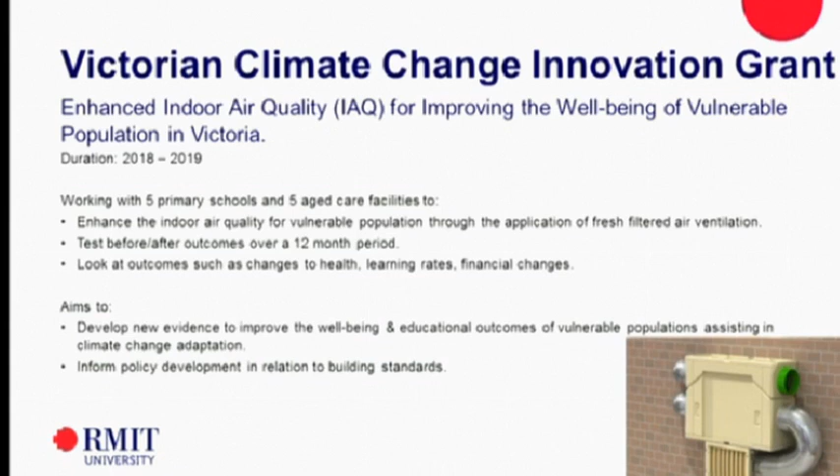It's testing an indoor air quality machine here, you can see it there, and it's testing before and after outcomes across a range of metrics, including changes to health, learning rates, particularly of the students, more so than the aged care patients, and things like financial changes and improved sustainability performance overall. The aim is that we can try and inform more sustainable development in these particularly vulnerable communities moving forward.

On the housing side of things, we're talking about housing today, the Nicholson Apartments, which some people might know in East Coburg, modular construction at the time was trying to include a number of different innovations. So we have evaluated this building over a number of years in terms of things such as resource consumption, thermal analysis, as well as engaging with the occupants - how have they been using these buildings, how have they found it, how have they interacted and engaged with those innovations of the building. There were some interesting outcomes in terms of the building performing as expected, but some of the challenges around the sustainability elements that they tried to include in the building there.

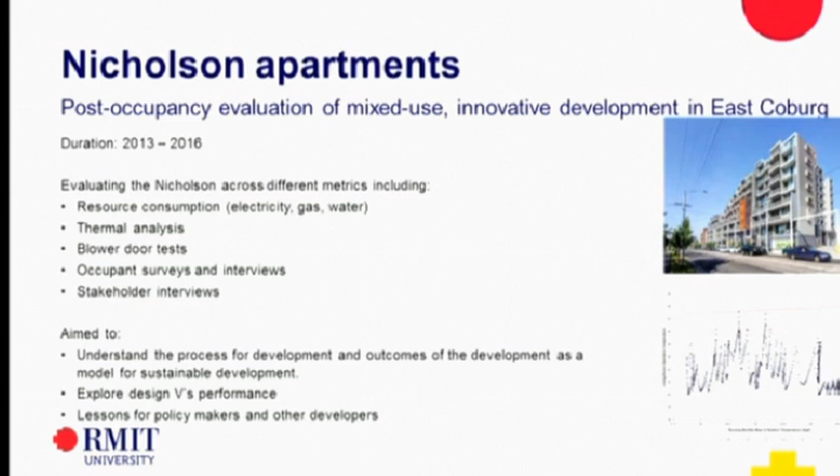The final one I'll talk about here before handing over to Alan is a project where we looked at some housing for the Department of Health and Human Services here in Victoria, who built 4 9-star houses out in Horsham, and we evaluated these over a 3-year period and compared them to their standard housing stock that they rolled out. They were interested to know what the benefits were going to be of improving their housing quality from a sustainability perspective. We found a number of different benefits, including improved health outcomes, improved financial outcomes, and improved thermal comfort outcomes.

You probably can't see it here, but the solid line in this graph down below is the outside temperature in the middle of a heat wave, and it was getting up to 43 degrees there on 2 consecutive days. The dotted lines are their standard housing, and you can see the temperature kind of tracks the outdoor temperature. The solid lines down the bottom are the 9-star houses without air conditioning. So for the department, it was really exciting for them to be able to see that what they were trying to do was kind of working in practice. Now they've been able to design and deliver housing that didn't need air conditioning, which opens up a range of other benefits for not only them, but the low-income households who are in there.

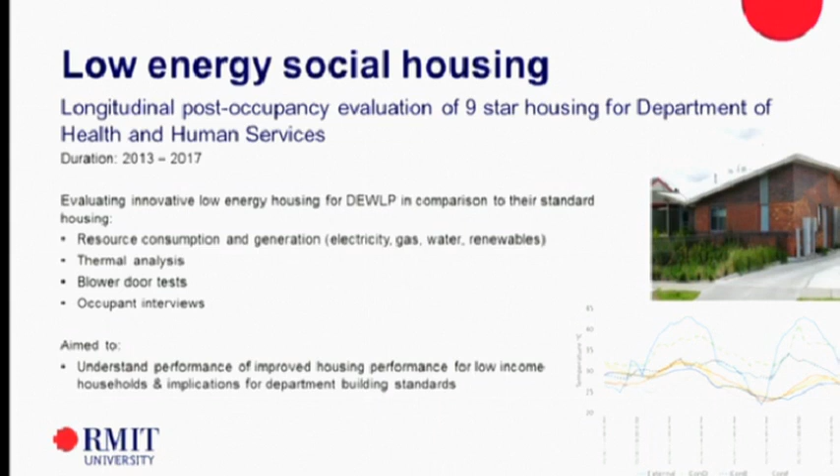The top picture is my west-facing hotel room in Manchester. It was good I was out doing touristy things between 2pm and 7pm, because the room was incredibly hot during that period, despite the air conditioning.

The slide shows the sophisticated heat dumping system of a hydronic heating system, on the window side of the curtain, making sure the area next to the glazing got as hot as possible. The thermometer is actually an old Energy Victoria thermometer.

You can't get them anymore. Of course it takes people like me to carry a thermometer to Paris, but there you go.

I had this nice room on the top floor with a balcony, and it was 35 degrees inside. I thought maybe I hadn't turned the air conditioning on, so I stuck the thermometer in the outlet of the air conditioner, and the air coming into the room was 32 degrees. I took the photograph downstairs as evidence and moved to a lower floor, because it was obvious whoever built this fairly modern building hadn't thought to insulate the roof.

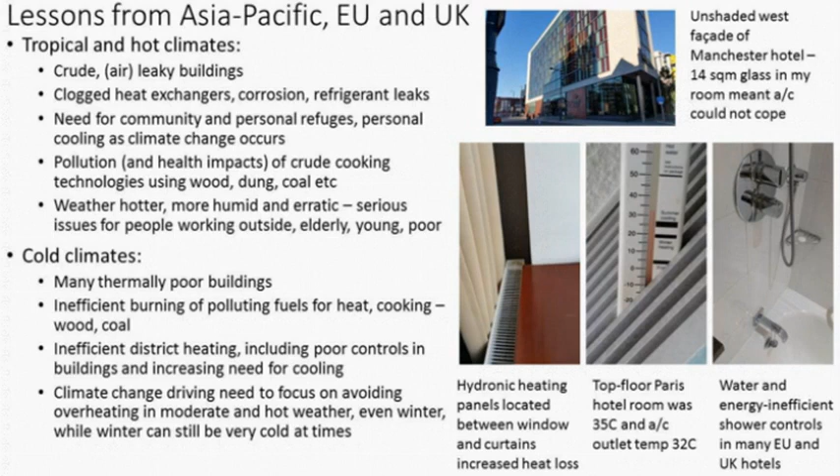So I basically cooked in Siberia in winter, okay? I couldn't work out the controls for a couple of days, and even when I turned it off, it still didn't cool down. So anyway, I think the big message from Siberia was that they're all overheating, even in winter. And I'll go to the next slide and that'll show you why.

So the top slide is the view from the lookout in Santiago over the coal smoke. The middle one shows the hydronic heating system for the district heated room, and you'll see it's got a very sophisticated lever. I don't know about you, but I never know which way to turn the lever. You know, so anyway, we got there.

The trouble is when I turned it off, you can see there are some pipes coming towards the heating unit, and there's such a long length of them in the room, and that still all stays with hot water circulating through it. So that was actually producing more heat than the room needed in winter in Siberia without the heating panel even running. So there you go.

And then the bottom picture, which you can't really see very well, but that is a hotel with lots of air conditioners on the outside. And basically just about every building in Krasnoyarsk in southern Siberia is festooned with air conditioners because they've got these highly insulated buildings with double glazing and no shading, and the sun is still fairly low in the sky, so it sort of comes in and cooks them. So they all need air conditioners. So there's interesting things going on here.

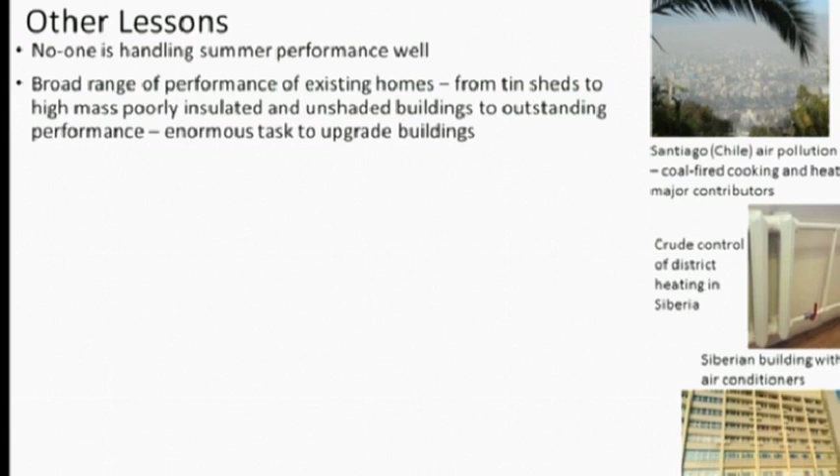Now, so what are the lessons? Well, I didn't find anyone in Asia or Europe who were handling summer performance very well. There's an enormous task in upgrading existing buildings, and I must admit I was a bit daunted by that, just to see the scale of it. And the spectrum goes from tin sheds with air conditioners in some developing countries through to really high-mass, poorly insulated, unshaded buildings in Europe. So it's not like any one of them has sort of a good solution with most of their buildings.

And of course there were big variations in access to renewable energy and the types of renewable energy, so you've got to think regional solutions.

I was a bit surprised that there wasn't as much emphasis as there is in Australia, really, in most of these places, about appliance efficiency. I mean, in some of the developing countries, they did have lots of appliance labels. In fact, in some places the appliances had about 3 labels on them, obviously for different countries or something. But I was a bit shocked that everyone has a long way to go to really take control of energy, the demand side.

And in Europe in particular, where I think people actually do obey laws, there's a sort of an over-reliance on mandated standards. And in fact, increasingly the policymakers trying to implement mandatory measures are finding that the econocrats are taking control over there, as they have here, and blocking a lot of action, and they don't really have other strategies that they can apply.

In Japan, it was really interesting to see the significance of the Fukushima disaster, because we were looking at green buildings and new community developments which were being designed to be able to run without the electricity grid for maybe several days. And so it's not like you're arguing about cost effectiveness and all of those kinds of things - it's like, no, we actually want to keep functioning when there's been something really bad happen. And so it was interesting to see how that was playing out.

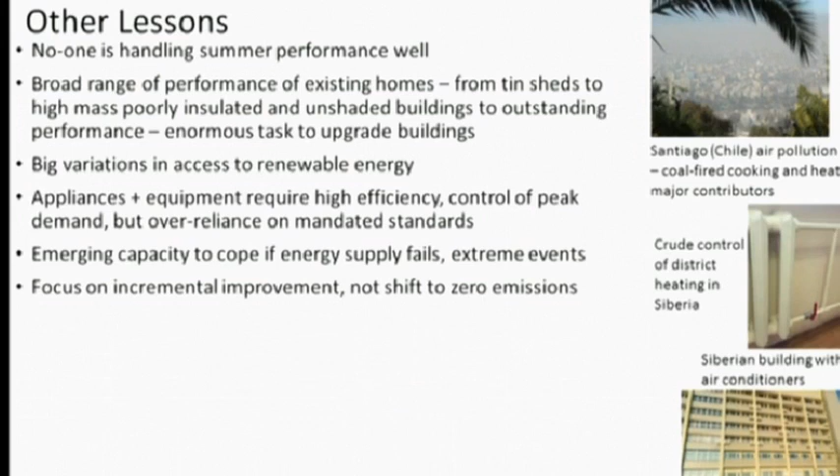Also, there is still a focus on incremental improvement, not a shift to zero emissions. And so, you know, the Russians are quite keen to keep using gas, and a lot of others are shifting to high efficiency gas boilers and things like that. And it's like, guys, that would have been a good idea 15 years ago, but we've got to move a bit faster.

I didn't see enough thinking about system performance, or enough on maintenance, or enough thinking about life cycle issues and about the significance of people's behaviour.

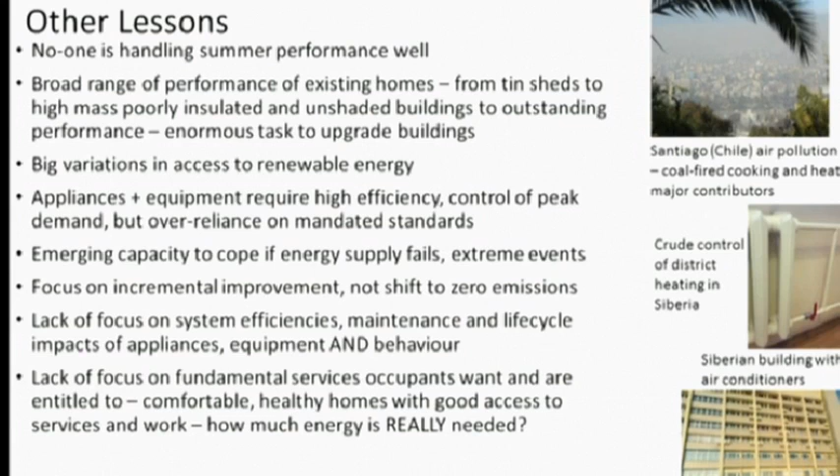This holds in Australia as much as everywhere else. There's not a lot of understanding of just how much energy people really do need to deliver the fundamental services that they want. I don't know what we do about that.

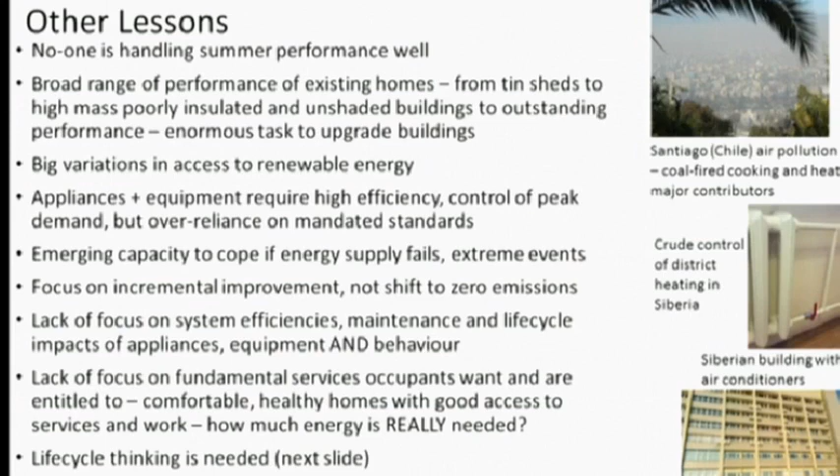As I mentioned, the life cycle issue is becoming really important, because as we change technologies, the balance between different elements of the life cycle is shifting. This is a bit of a plug for some work I've been doing with a group called the Australian Alliance for Energy Productivity, where we've been trying to help business people break out of traditional sectoral silo type thinking to realise that they are actually one element in a system going from raw materials to a useful service like shelter or nutrition. We call this the value chain, because you've got to talk about value and business benefit when you talk to business, we've discovered.

One of the interesting things, if you look at the third last point there for the operating, commissioning, maintenance, operation, what's interesting is when we break down the data for Australia, we find that space conditioning is actually not that much bigger than some of the other elements in the supply chain, in the system. I think this is reflecting that we are improving our buildings a bit, but also we do have a fairly mild climate by world standards.

The reality is we are going to need to focus a lot more on the energy embodied in the materials and the technologies and the buildings that we've got, and also particularly in recovering the resources that are freed up by the demolition or removal and replacement of appliances or whatever. We are throwing away valuable resources, and we can't keep doing that.

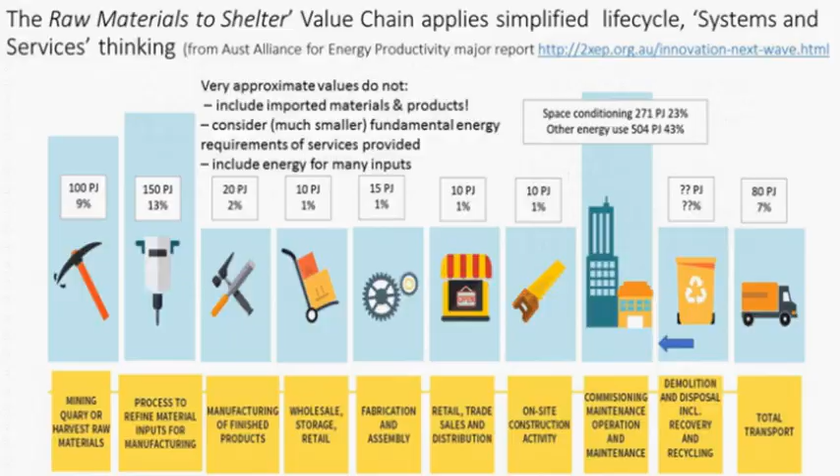I haven't gotten on to buildings yet, but I'm getting there. This might be the last slide before I start talking about homes.

I'm getting very concerned, even more concerned than I used to be, about climate change and how it's impacting on everything. In particular, if you're building a house, you need to keep in mind that even in Australia, the average life of a house is like 75 years. That's a long time, and the climate's going to be really different well before that house is demolished, hopefully.

With relatively small changes in the temperature, the increase in frequency of extreme events is much bigger. We're just facing longer hot spells that are hotter and nights that are more humid. This is becoming a real issue.

It's all very well to have people say, oh, you don't need an air conditioner. Well, maybe you don't, but then again, in a few years you might. We also need to recognise that the elderly, the sick, the young - there's a whole lot of people out there, or there's also the people who are frightened of someone breaking into their house, or people who live near a noisy place, who won't be ventilating their house too much. So we need to really recognise these sorts of challenges that are coming through.

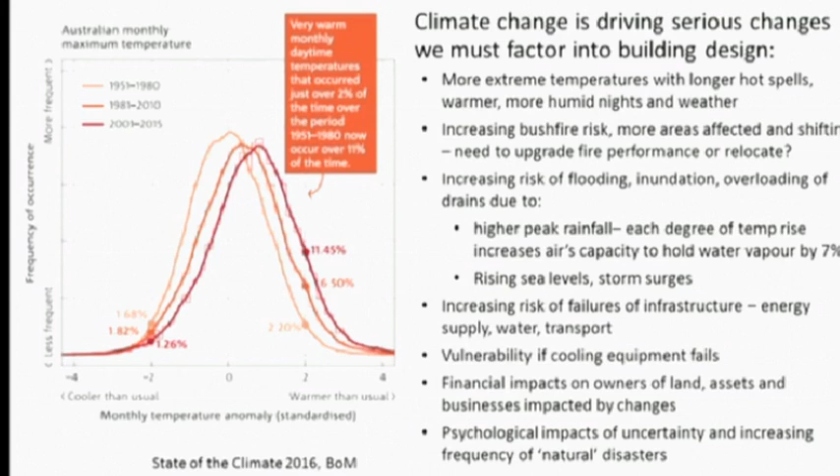And there's the question of uncertainty. Uncertainty eats away at people in ways that can be debilitating over time. So, yeah, that's cheered you all up, hasn't it? Right, okay, now we get into some nerdy building stuff. Well, you can see where this is nerdy.

I thought I should talk about what we use energy for in our homes. The answer is, it depends what indicator you use as to what you think might be important. So the first bar on this side is the breakdown of electricity use, and again this is overall for Victoria. So you could say this is for this mythical 2.5 person household that's got a bit of gas and a bit of electricity—it doesn't represent any of us, but it's the overall result.

What's interesting when looking at electricity is that appliances make up about half of the electricity we're using, of which refrigeration and the combination of TVs, entertainment equipment and IT equipment are really big chunks. At the same time, if you look at a small bit like pools and their pumps, that doesn't look like much, but less than 10% of Victorian households have a pool—so if you've got one, the pool pump's really big. Likewise, apartment common areas is only 4%, but how many of us live in high-rise apartments? There's a lot of energy waste in those common areas. It's interesting to unravel all of this, at least to people like me.

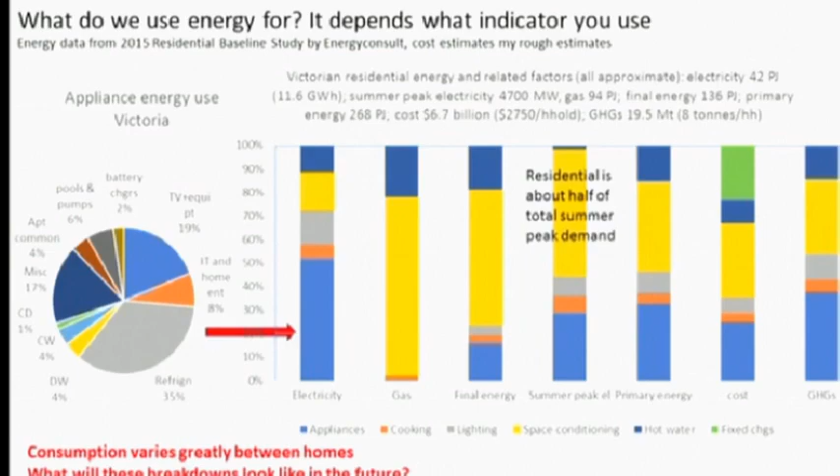Given that appliances and things are a big issue, this slide is really about a hypothetical 2 to 3 person all-electric household, and the blue bars are how much electricity they would be using for a typical household. And then the orange bars show how much they would be using if they were using best practice technologies, and I declare there's a bit of behavioural stuff in there as well. But there's a big message here, which is if we want to drive rapid change, we have to identify and replace a lot of faulty, inefficient, old equipment.

And that's where there is enormous opportunity that is not being captured by, you know, mandatory standards and stuff like that. That's a 90% saving. Yeah, easy. Keeping in mind, well, if you've got an old fridge that's using, you know, 1,000, 1,200 kilowatt hours a year, the new 460 litre, one particular brand, not that expensive, is using 260. So there's 75, 80%.

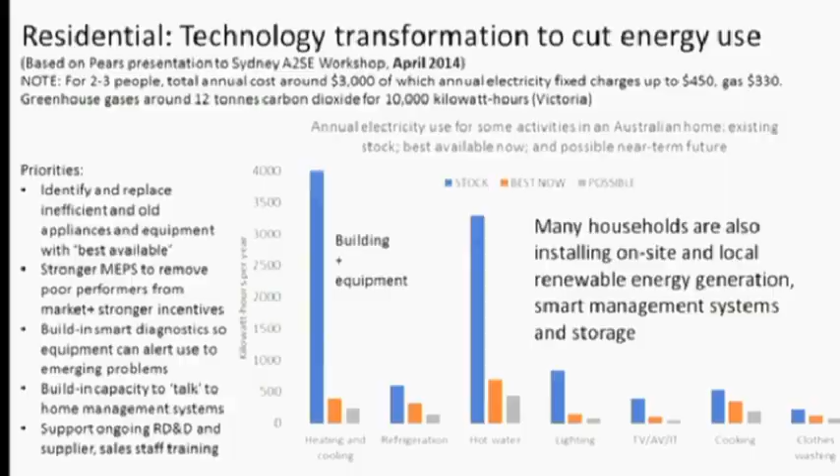I won't go on. Right, okay, here's the test. This is where I get nervous. This is the thought experiment: the zero energy bill home and car.

I should point out Tony Isaacs, who many of you may know is a buildings guru, is a good friend of mine, and he and I were writing about this, and he got all excited about it before I did, so I've stolen his idea.

But basically it's kind of interesting that it is feasible to save $2,500 a year if you combine the savings on an electric car and for your house, and you can use it on holidays too. It's got multi-purpose.

So there's kind of interesting things going on here. Anyway, yes, and also people would have all the e-bikes.

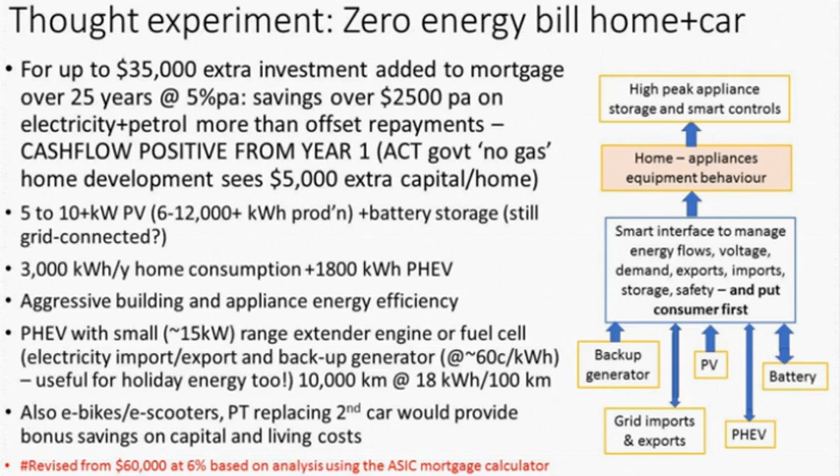The other thing I've got in this at the end is the concept of high peak load appliances actually having their own storage to minimise the wiring costs within the house, because that's something no one ever talks about, except people like me who want to put an induction cooktop in an all-gas house that's fairly old and gets a quote that's more than the induction cooktop. So there's some things to think about with that.

Also, I'm very big on the concept of integrated systems, and this just shows you the daily output of a PV system in Melbourne, a 5 kilowatt PV system in Melbourne, in the hot months and in June.

We need to recognise that if we've got a PV system, it is not the silver bullet by itself. It's a really good thing to do. I'm not saying it's bad, but you need to remember you'll have a lot less power in winter, and you could have a few days in a row where you don't have a lot, which is why you have to have either a backup generator or a portable import-export device called a plug-in hybrid or an electric vehicle, which you can borrow some electricity from someone who's got too much and top up your battery with that.

In fact, this is one of the things that a lot of people who work for grid companies keep saying - oh, you'll have to be connected to feed all of your excess in summer and then you'll need us in winter. Well, I don't know, if I had an electric vehicle, I could probably sell some of the power for more than they were going to pay me.

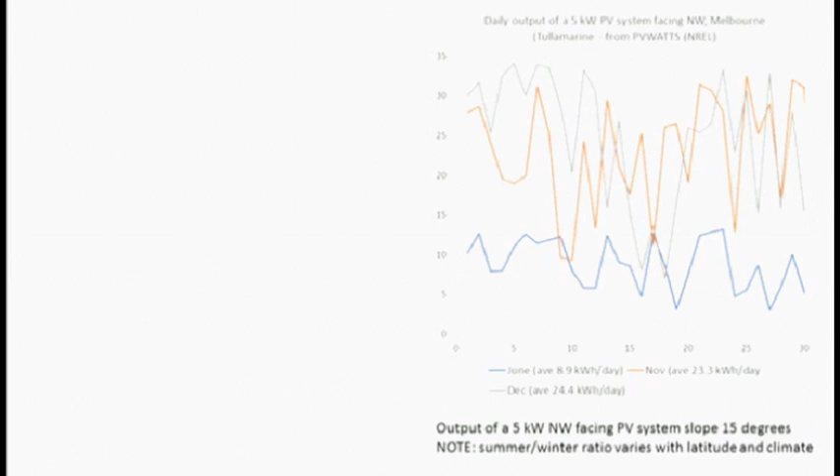So there's interesting kinds of options for us, and it is a question of none of us really knows how this will all play out, but lots of the people who are doing the thinking and making the decisions are actually only seeing incremental change, and they're not stepping right back and saying, well, if I didn't have the grid, but I did have an electric car, how would I try to do things? So interesting to me.

The key message for me is you want to have a mixture of things packaged together so you can get the best outcome for yourself. If I've got an energy efficient building with energy efficient equipment, that reduces my annual consumption and typically reduces my peak demand a lot as well. If I've got smarts to manage my demand, I can shift my usage away from the peaks or to the times when it's cheapest. If I've got some energy storage, and there are increasing options for us, that provides me with stored energy when I need it, and breaks the linkage between the supply system and me.

But you need to keep in mind that energy storage systems use energy. They lose some energy in the round trip. So again, something to keep in mind.

Then obviously energy production on site, most of us would look at rooftop solar for that, but you can have local and regional solutions. And last of all, you can do energy trading, through the grid or via your import-export vehicle. Energy trading allows you to import or export when you need it or want it. So all of those things together start to deliver a really interesting, nice story.

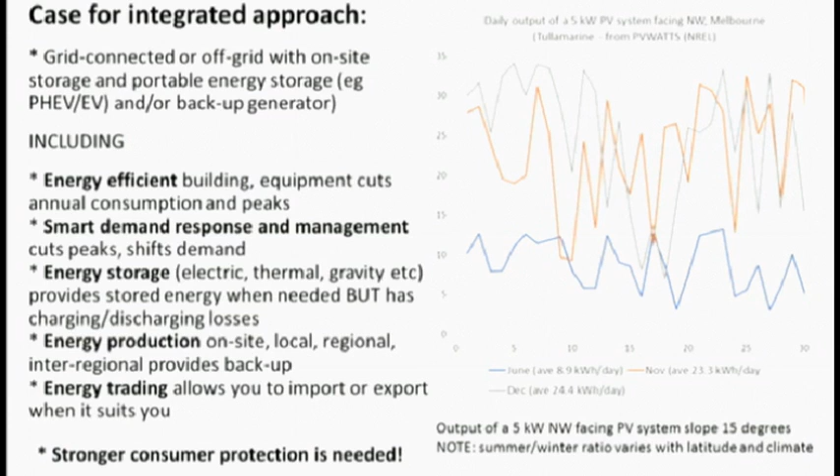Okay, what's this one saying? Okay, now what I'm going to do is just talk about home comfort, cooking, hot water and lighting, very quickly. Actually, I'm not doing too badly. We were feeling a bit awkward about me going on for an hour and a quarter, so that's okay.

So I've got some criteria I'm going to apply when I look at these different activities. One, peak demand. Peak demand matters. Why? First of all, because I think energy suppliers are going to increase peak charges, and they may well start setting them the way they do for businesses, where in Victoria they look at your highest demand in the last year and say, well, you've got to pay a monthly charge based on that.

And if you listen carefully to some of the energy companies, they're talking about the mobile phone model. If you want high speed and lots of gigabytes, you pay more, even if you don't use them. This is a very interesting path, and they're arguing this because they're saying there's going to be so much renewable energy with a marginal cost of near zero. How are we going to make money? Charge you for capacity. So we need to keep that in mind.

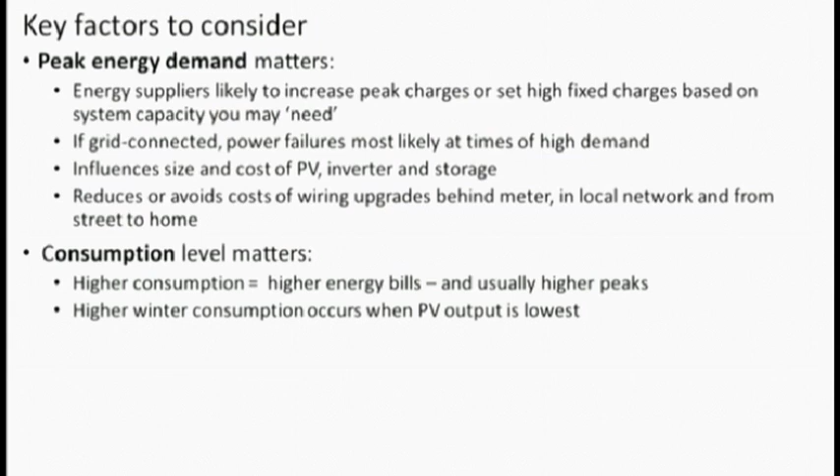Building design and appliance and equipment selection matters because, as I said, a house is going to last 75 years. It's locking you in because it's really hard - I can vouch for it, I've written an article about trying to get insulation in my brick veneer walls. There's a lock-in factor, and even with an appliance like a fridge, it might last 15 or 20 years, so you need to think about the long term.

At the same time, on a positive note, good building performance can lock in your comfort, better health, and also capital cost of heating and cooling equipment, and the resilience of your house if your air conditioner fails on a hot day. If you've got a good building, it'll keep cooler for longer. So there's a whole bunch of things like that.

There's also this extent of intervention. I don't know about everyone else in this room, but what I like is a house that just sits there about the right temperature without me having to remember to switch things on and off, and the noise of the fan and all that stuff. I think there's something that's good about not having to actively drive your house all the time.

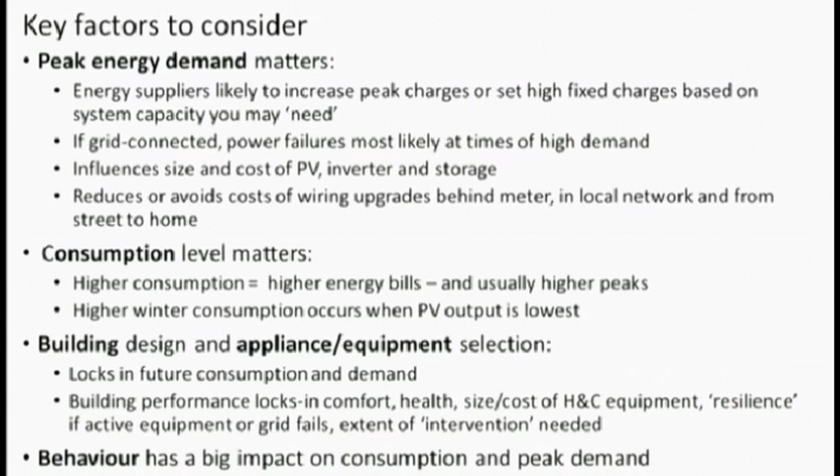Oh dear, behaviour. Ooh, yes. Behaviour is a really big issue, as some people in this room well and truly know.

So thinking about those 4 criteria, what are we going to do in terms of comfort and health? I haven't used the words heating and cooling - I've used comfort and health because that's what I think we're on about.

The graph at the bottom shows basically if you had a 7 or 8 star house, what your peak demand would be relative to an uninsulated house on a hot summer afternoon. Actually this is quite old - 38 degrees I thought was hot when I did this. Well, 45 now I guess is what we're looking at. But the point still holds that a good building has a lot lower peak demand, which can help in lots of ways.

The very small table up the top, I'm sorry that's all fine print, but it looks at an insulated wall, an uninsulated wall, a super duper triple glazed, low-E argon filled window, and a single glazed window. If you're looking at the conducted heat, you can see the single glazed window is 88 watts and the R3 wall's 5 watts.

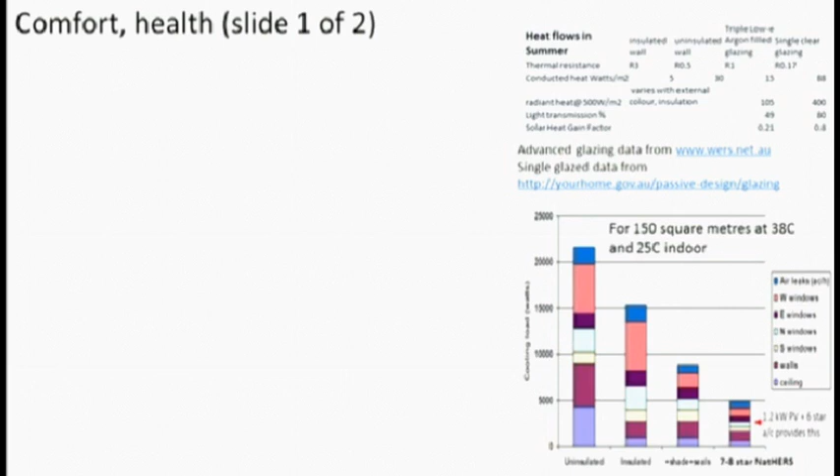If you look at the radiant heat, well there is some radiant heat from the walls, but it's really hard to calculate and it's not very big, so I've left it out. But the interesting point is that the radiant heat flowing even through the triple glazed, low-E argon filled window is still 100 watts, with 500 watts of heat load. This is something a lot of people don't get - even really fantastic windows are not very good in terms of heat flow if they are exposed to sunshine. And shading is really, really, really important. That's kind of the main message from that complicated table.

So I reckon we need a high-performance building fabric. I think we are moving towards energy recovery from ventilation, and I noticed Traverse is doing some research in that space. It's not for all the time - a lot of the time we can let our house go free and have windows open a bit. But once you're getting really hot weather and really cold weather, the energy involved in that air coming in and out is actually a big part of the total once you've got a good building. So I think we're going there.

Again, to me, it's not either/or about natural ventilation and heat recovery ventilation and sealed houses. I like to be able to open up a house when it's convenient and it feels nice and the weather's right. But the reality we're facing is Mother Nature is getting less friendly and the extremes are becoming more difficult. That's how it is.

I've talked about exposure of glazing to sun. Light coloured adjustable shading's good. Adjustable shading's great because you can get really hot weather in March now, and that's when the sun's getting towards the equinox. So we need to think a bit about adjustables.

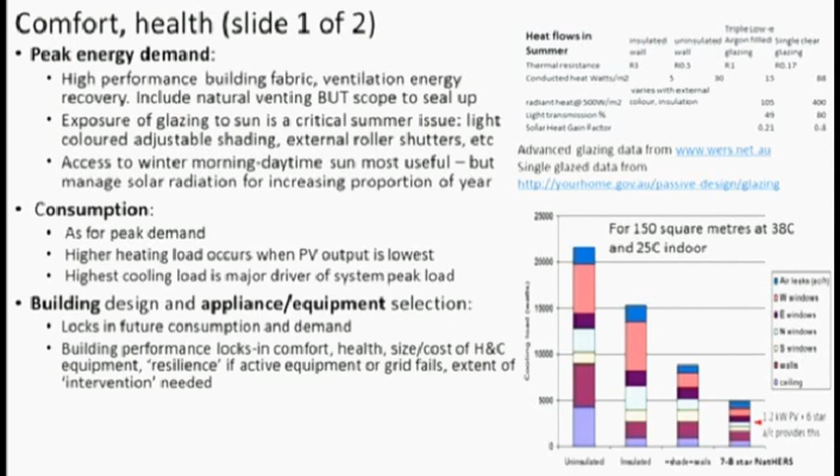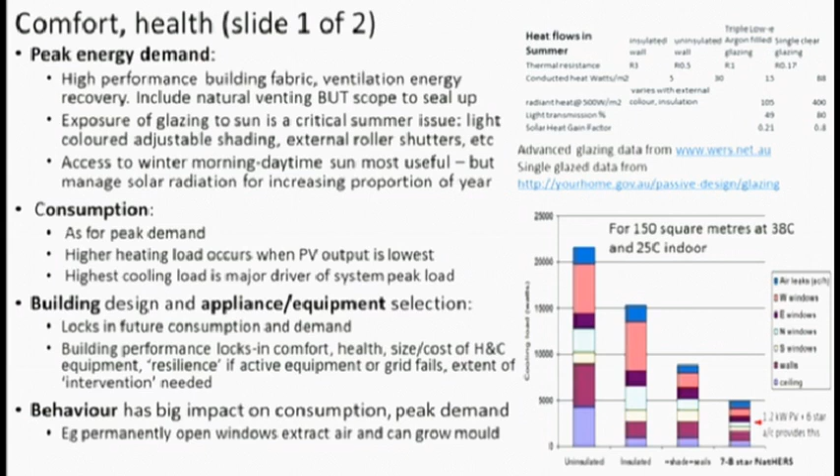So, behaviour. One of the classic issues that some RMIT people found was that lots of people like to keep windows permanently open, just a bit. If you think about it, if you've got two openings on opposite sides of the house and the wind blows, one of them becomes a great suction system to remove air from your house. So there's issues there.

This is just a few thoughts which I might skip over because I should try and finish soon. But getting the microclimate around your windows and your house right helps. There are interesting daylighting options emerging. You can get translucent aerogel insulation, which is super performance insulation, but you can't buy it in Australia—just Europe and Canada, I think.

You don't have to have opening windows. You can have openable insulated panels if you don't want the problems of a window, but you want to be able to ventilate.

The exhaust fans and range hoods are significant—I'll cover that in a minute. Thermally efficient retreat rooms are quite an interesting concept, and I think Renew had an article about such things a while ago. Particularly for people who are vulnerable, helping them get a really good room that works, with even enough energy supply to keep it comfortable, could be a really good thing.

Radiant heating and electric throw rugs, there you go. There's a pretty interesting kind of throwaway line.

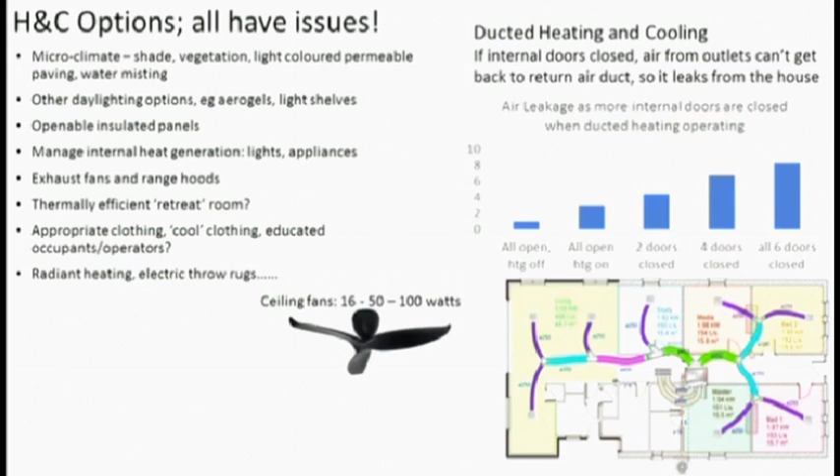Ceiling fans, again, some ceiling fans are much more efficient than others. Choice has lots of info on that. And again, reverse cycle air conditioning, if you do it right, can be great.

What the bit over the other side is about is one of the problems with ducted heating and cooling systems: for them to be efficient, the air has to get out of the outlets and back to the return air register. Often it is easier for outside air to get to the return air register than for the air to fight its way back.

The bar chart up the top shows a test done in the US where they had all the internal doors open and no heating running. Then they had a bit over double the air leakage when they ran the ducted system. As they closed more and more doors, they ended up with 8 times the air leakage, because once you close the door, the ducted air in a room can't get back to the return air register, so it leaks out where it can and a whole lot of outside air comes in. I don't have a great solution if you don't want lots of split systems around, but ducted systems can be very unfortunate.

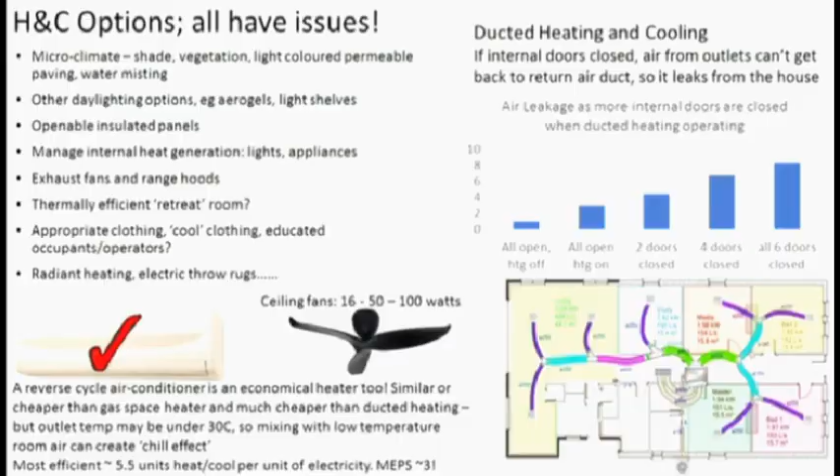Okay, now this is some work Tony Isaacs provided me with. Lots of people pretty much have to get a house energy rating done when they build. You should ask your energy rater to run the house in free running mode for the representative hot week and cold week, because if they've broken your house up into zones or rooms as they should, that will really help you understand how the different parts of your house will work.

So again, what you'll also find is that the rooms on the south will tend to run cooler all year round. The rooms on the west will cook on hot afternoons. Every different part of your house performs differently depending on its own microclimate. It's really useful to think about what you're getting and what you really want from different rooms.

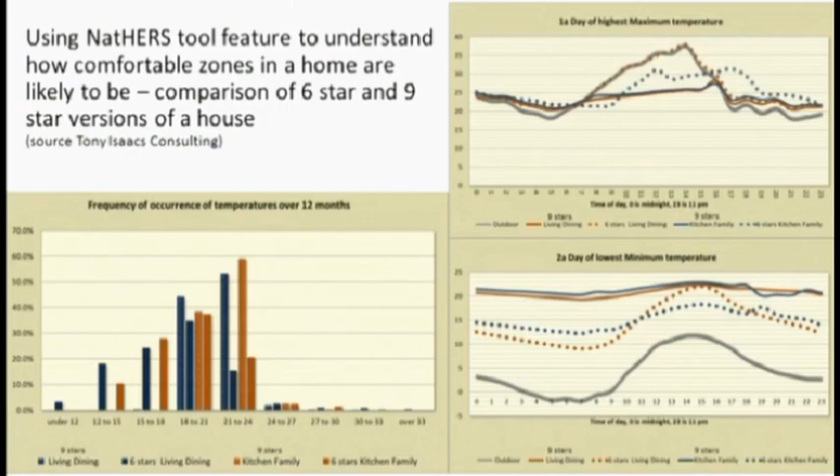Okay, cooking, I'm nearly finished. Induction cookers, if you're trying to heat up a heavy pot and a reasonable amount of food quickly, can have quite high peak demand. But the actual amount of energy consumed is not very big. So doing that kilogram of steel and 1.5 kilograms of food and water only uses 0.3 of a kilowatt hour of electricity.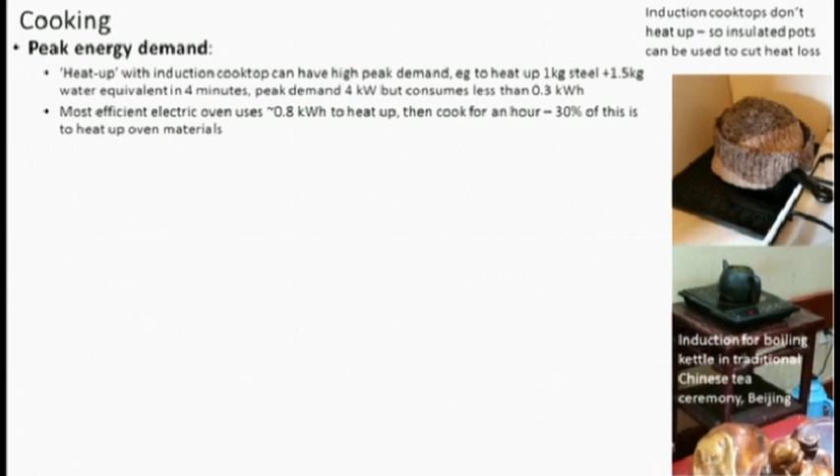And also even efficient electric ovens still use quite a bit of power, including quite a bit to warm up themselves because they're heavy metal. So there's interesting issues here about how to deal with that, which I'll cover a bit later.

In terms of consumption, induction cookers are the most efficient. A gas cooktop's got four times as much waste heat going into your room as an induction cooker. And you can see my beanie on top of my pot there. You could not do that with a gas cooker or with a traditional electric cooker because it would catch fire. But I can tell you it hasn't so far.

And I thought it was also cute. When I was in Beijing, I went to this traditional tea ceremony and they were heating the pot of the kettle on an induction cooktop. So there you go, the world changes.

Also, what's interesting is that everyone gets excited about induction cooking, but it's not as efficient as a resistive electric heating element, actually, if the heating element is inside an insulated container, which, of course, I've never found something that does that. Maybe you have.

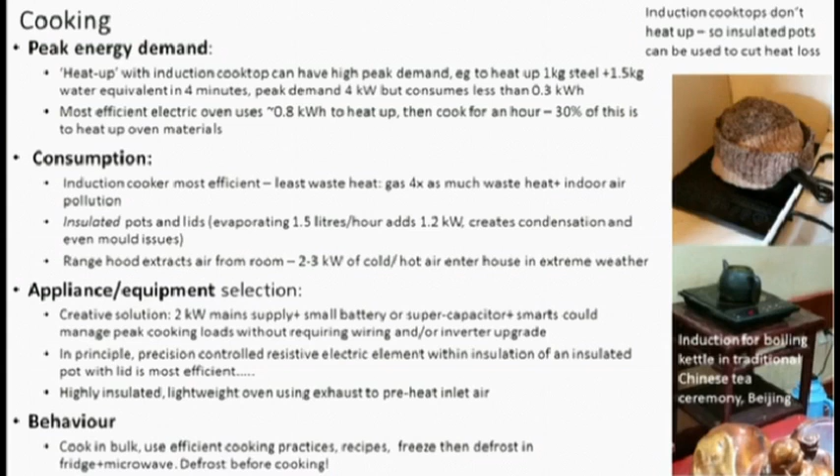Behaviour: cook in bulk, put the lid on things. Boiling water is very energy intensive, right, phase change. And don't try to cook things that are still frozen, because the thermal resistance of the outer bits of the food means it takes a long time to make it safe to eat.

Hot water, this is very quick. Resistive hot water and solar boosters with resistive electric heating have high demand, and solar requires most of its boosting in winter when you haven't got lots of energy if you're trying to minimise your grid dependence. And the best heat pump water heaters are looking quite good.

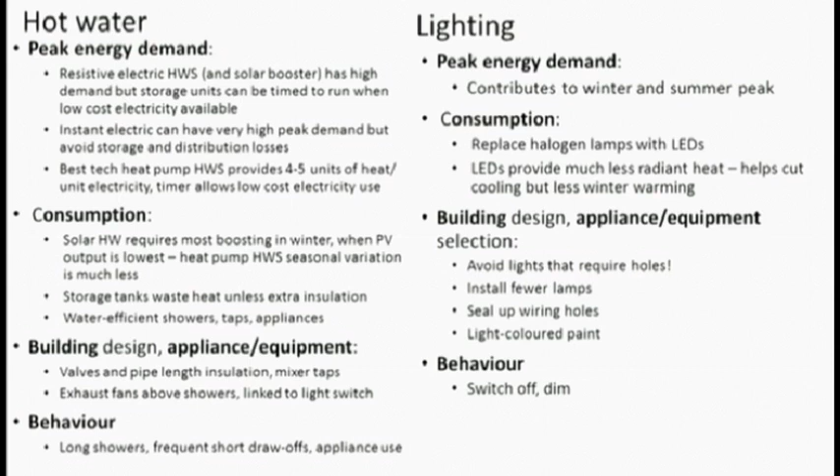Yeah, I'll skip over the rest of that because it's fine print really. And then lighting: again, LEDs are just truly remarkable, but you still don't want to cut holes in your building to put them in because that creates air leaks. So there's a bit of detail in there. And you should always switch things off if you don't need them anyway, I think, but there you go.

Okay, last slide, just to highlight: use the energy rating website to select appliances, because the difference between the best on the market and the worst on the market in most product areas is large.

And you don't have to buy the absolute most efficient one that's really expensive. There are lots of really good ones that are reasonably priced. But again, this just highlights how badly governments have done mandatory standards in Australia, because really half of those products should not be on the market. But, you know, the world moves slowly.

And this is just a few other little snippets about old plasma TVs. If you've got an old plasma TV, or if you've got a TV that has a fan, you have an inefficient TV.

Heat pump clothes dryers are getting cheaper, which is good. Refrigerant leakage is a big issue we have to deal with, and there's ways we could do that. And there are lots of exciting emerging technologies which will be more and more efficient. And the frustration is we don't have a major research and development program to drive all of this.

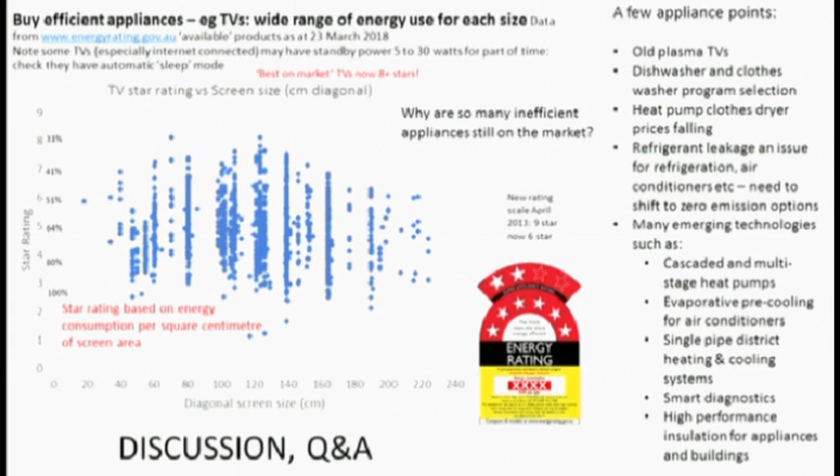The Virtual Centre for Climate Change Innovation, a state government initiative, has issued grants for a range of projects recently. One is the Climate Safe Rooms project, run by Geelong Sustainability Association, CSIRO, Uniting, and the Victorian Council, looking at increasing the energy efficiency of dwellings and concentrating on electricity. Going into a house, finding the rooms most efficient to start with, doing electrical work in those rooms, putting in a reverse cycle unit like a Daikin with a published performance of about 6, then putting 1.5 kilowatts of solar on the roof, which will generate more power than the actual use.

We were told by social service people that there's no point putting an air conditioner in a house if the resident thinks it will use more power and cost more. So we have to show them that the system will not only power the air conditioner but will actually reduce their overall electricity demand.

That project has started and will run for 2 years, through until the middle of 2020. The CSIRO monitoring equipment going into the homes won't just look at thermostat settings and comfort, but will also look at behaviour, because the sensors will know when a person moves from room to room, when they're actually in bed, all those sorts of things. So that's a rich data set to see how well it works.